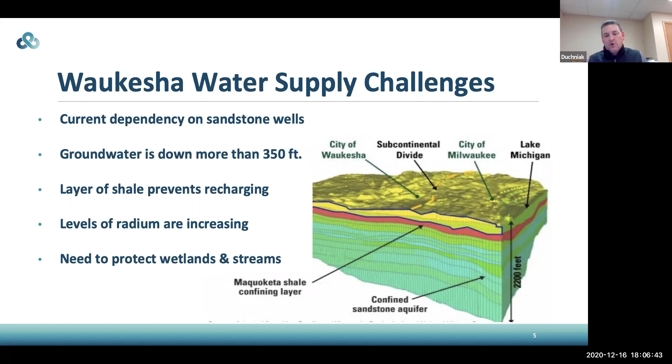That drawdown results in water that is older, having been in contact with the natural geology, and radium has been transferred to that water—we have radium in our water, among other contaminants. So we need to look for a new water supply, and we also need to protect our wetlands, rivers, and streams, since any of the alternatives has a significant impact on local wetlands, rivers, and streams. We went through the application and determined that Lake Michigan is the only reasonable alternative. It's been over 20 years of research—I've actually been at the utility just about 19 years. We studied 14 of those alternatives in depth. Lake Michigan came out as the only reasonable, long-term, sustainable water supply for the city of Waukesha. It is also protective of the environment, and it is the best solution for ratepayers, with the least amount of environmental impacts. Very minimal acreage is impacted as a result of this.

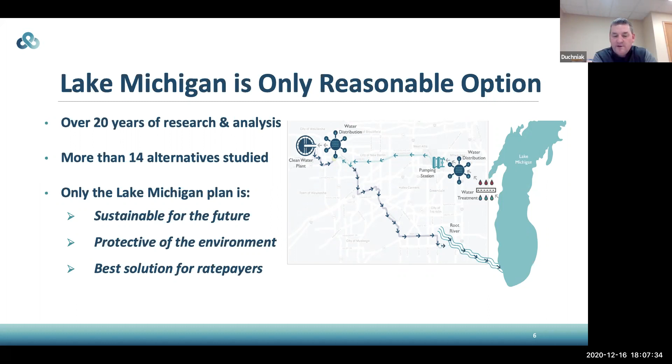This was studied and completed through an environmental impact statement, done in phase 1 of our program. We worked with the DNR to get approval, and that was developed through an environmental impact statement which analyzed those 14 alternatives.

Once the DNR determined it was an approvable application, they notified the Great Lakes Compact Council that they believed they had an approvable application, and that was in December of 2015. After about 6 months, the Great Lakes states and Canadian provinces unanimously approved our application for Great Lakes water.

Then we moved on to negotiate a deal with the city of Milwaukee to supply us with water for the residents of the city of Waukesha.

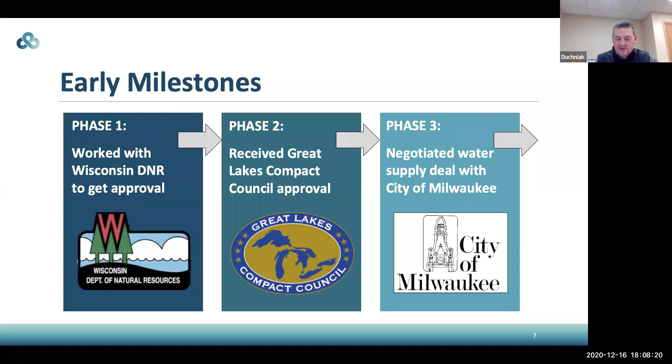In the 4th phase, we actually settled with New Berlin on a booster pumping station site. We decided to relocate that to a site that wasn't originally available, as it was under contract to be developed as a memory care facility. When that memory care facility fell through, that property became available to us.

We met with the owners and came to an agreement with them, and came to an agreement with the city of New Berlin on relocating the reservoirs and pump station from the site in Minooka Park to the site at the Nike Rempe site, on Broadway and the bypass within the city of Waukesha. So that booster pumping station and reservoirs will be located at that site in the city of Waukesha.

We also worked with the federal government and applied for and received a WIFIA grant, which is basically a low interest loan for this program. It's a government subsidized loan, and we get it at a very low interest rate over a longer term to help us reduce the cost to our residents.

And we are now in phase 6, where the pipeline construction has begun. Construction of the return flow pipe has commenced. We started at the clean water plant in the city of Waukesha, and we are now working up Century Drive towards Sunset Drive in the city of Waukesha.

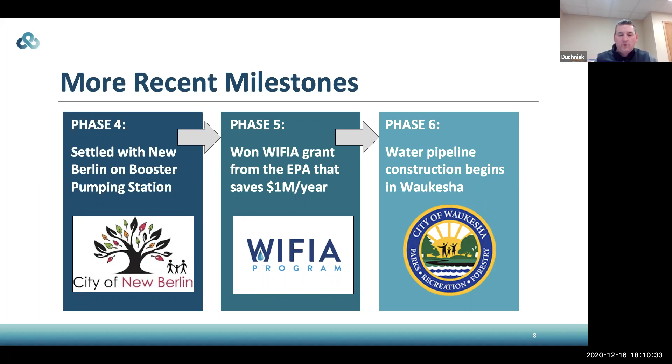With that, I'm going to turn it over to Katie, who will talk a little bit more about the route and the communications you can expect during this process. So Katie, it's on to you.

Thank you, Dan. As Dan mentioned, my name is Katie Richardson. I am the program manager for the Great Water Alliance and have been working with the water utility on this program for the last 4 years. I'm going to talk a little bit about the route, and Jeff will get into more details about that, and then also what you can expect to see as we move through construction as far as communication.

This part of the water supply pipeline that we're talking about tonight is known as Contract Package 2A, or CP2A. As Dan mentioned, that starts in the vicinity of Coffee and Schwartz Road in New Berlin, and then heads east to the city of Milwaukee and a new water supply pumping station that's going to be located in the city of Milwaukee. As you can see, that's the light blue, light greenish line on the top of the map here.

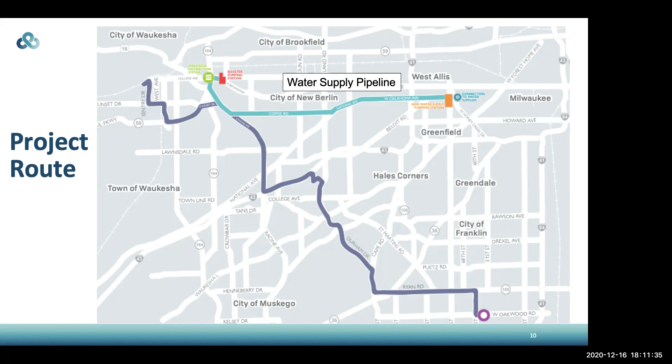The construction for this pipeline is going to begin in 2021. This year in 2020, we've been working on doing the construction submittal reviews and making sure that the contractor has all the materials that we have specified ready to go for construction to start.

We anticipate next year in 2021, construction beginning right away in January, and it will move through New Berlin, including both tunneling or trenchless technologies and open cut activities, which is an open trench that you'll be able to see the pipeline construction in throughout next year. We anticipate the completion of construction of this section from Schwartz and Coffee to the city of Milwaukee to be completed in 2022.

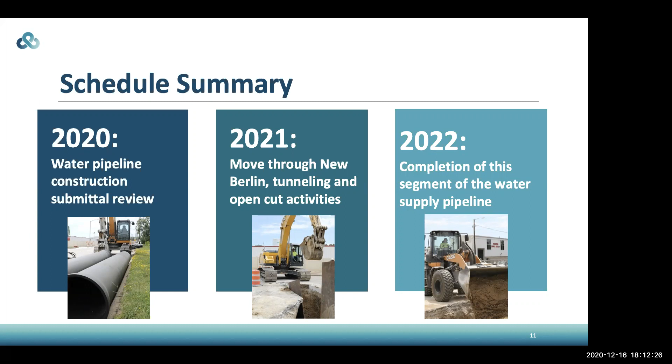During that time frame, your best source of information is going to be the Great Water Alliance website. The website, which you likely have visited if you registered for this open house, has information like an interactive route map. That route map is updated with icons showing where construction is and the progress being made, so you can check in to see exactly where construction is located.

We'll also have information specifically related to the city of New Berlin in the In Your Area for New Berlin section. If you go to In Your Area at the top of the website, you can click on New Berlin and find construction updates, potential open houses, or any other items we need to communicate specifically to you. There will also be overall general construction updates on the website, including information about the whole program and all the different contract packages and where they are in construction.

Additionally, the website has a lot of other ways to sign up or get information from us, including communication channels like texting if you want information to come to you instead of having to go find it. We also have a hotline number, available here or on our Great Water Alliance webpage. That hotline is a voicemail system, so you'll leave a voicemail and someone from our team will get back to you within 24 hours. That's always available to you.

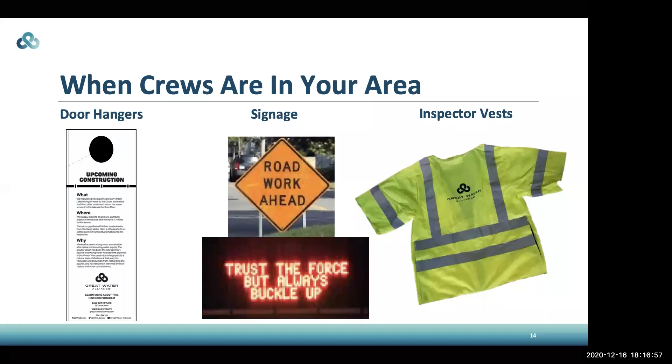They'll have on a vest or jacket with our three-looped Great Water Alliance logo - you can see a picture of it here on the slide. If you have a question when construction is in your area, whether it's right out front or you're driving through, look for the person with our logo on their safety gear. That is who you want to approach to ask any questions that need to be answered in the moment.

When construction is occurring, whether you're driving by or it's in the right of way near your home, safety is our number one priority. If you need to talk to somebody and have a question that needs answering right away, please look for our inspector in the safety vest with the Great Water Alliance. Also pay attention to the barrels, signs, and flagging operations. Your safety and worker safety are our priority, and we want everything to go smoothly so construction can be done efficiently and get out of your area as quickly as possible.

It's really important that you are mindful of the signs and what the inspectors are asking you to do. If you go out on site and have a question, or something is happening adjacent to your property in the right of way, please pay attention to where the construction workers or inspectors ask you to stand. There may be situations where work is happening underground in a trench, so we want to make sure you're in a safe spot to stand and talk to somebody. Just find the inspectors with the Great Water Alliance so they can help you.

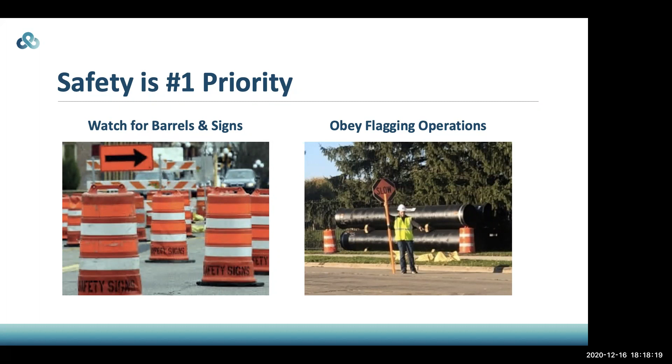So with that, I'll turn it over to Jeff, and he can get into a little more detail about what the construction is going to look like.

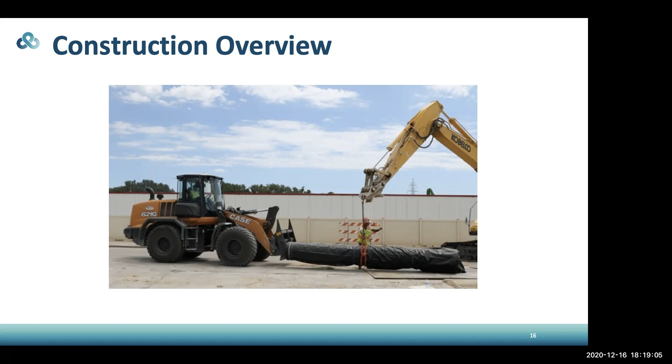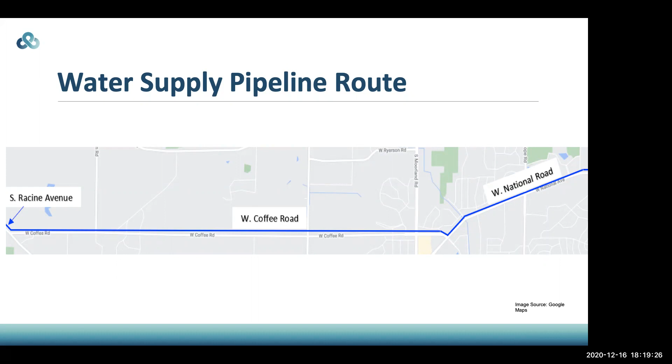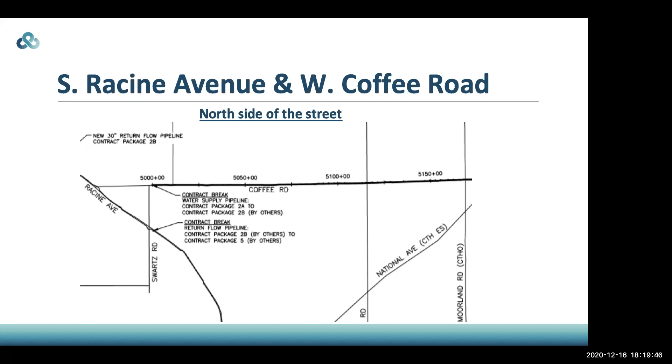This is a quick overview of the route that the water supply pipeline will be following. As Dan mentioned, it runs along National Road and Coffee Road. On Coffee Road, in general, the return flow pipeline will run on the north side of the road from Coffee and Swartz Road, through the city of New Berlin to National Avenue, and then along National into the city of Milwaukee. The water supply pipeline is scheduled to lay primarily on the north side of the road as well.

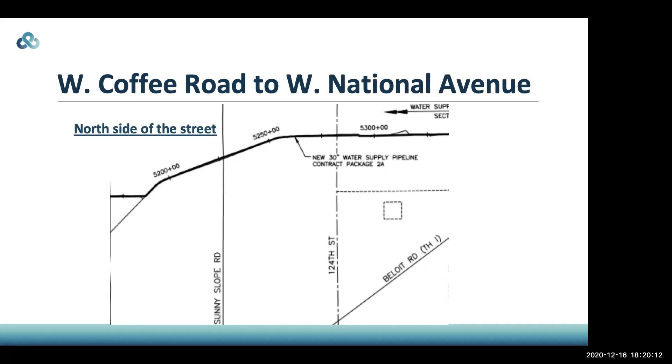The anticipated start will be here at Coffee and Heide Lane. This location was chosen to start during the winter months while the asphalt plants are closed. This section will remain open to through traffic with minimal lane restrictions and flagging as necessary.

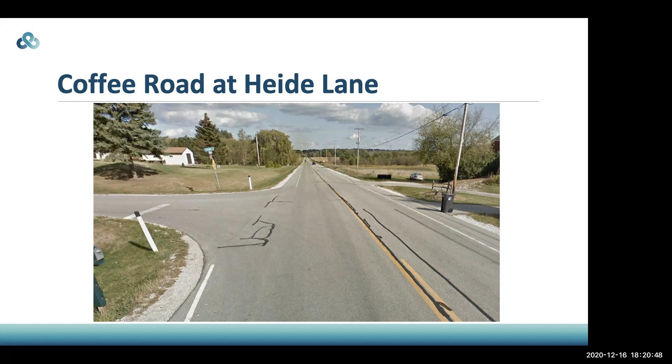Some of the innovative technologies used to complete a project of this nature are trenchless technologies, which include horizontal directional drilling and jack and boring. We utilize trenchless technologies at major intersections and waterway crossings to minimize the impact to the community and environment, and to make it a less impactful process in those areas.

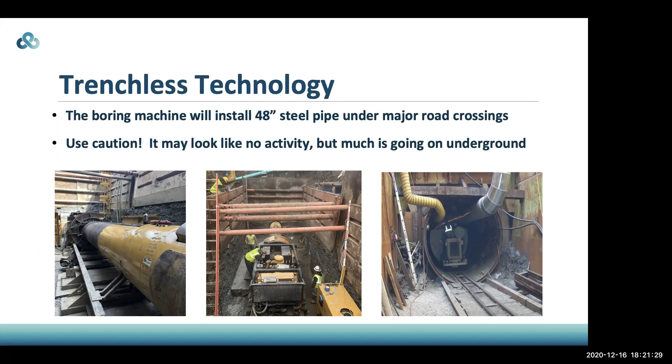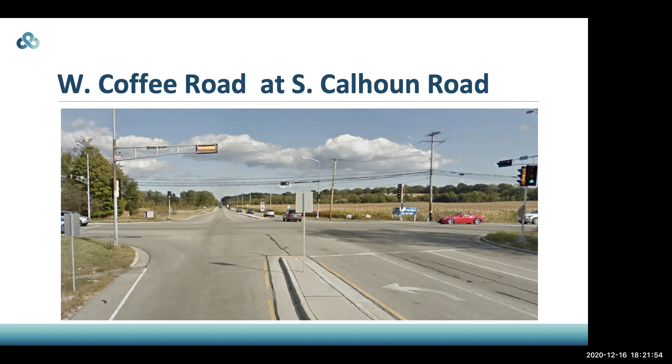One of those locations is Coffee and Calhoun, where we'll run trenchless technologies through the intersection to try to maintain traffic at this busy location and minimize impact to the community. Another location is Coffee and National, where we'll use a variety of innovative construction techniques to minimize impact and maintain traffic as best we can. Please be aware we may need to block some lanes in some locations, but bear with us. We've gone through extensive traffic control studies to make sure we're providing the least impact possible.

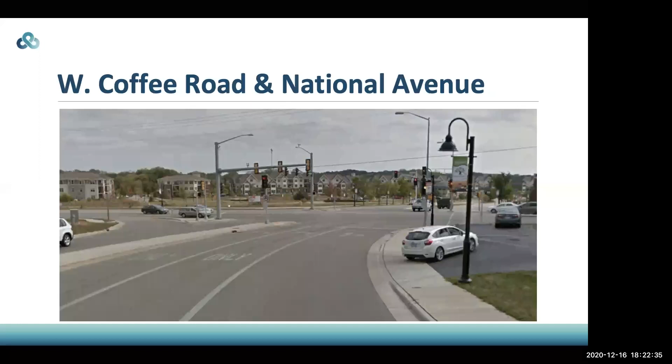Super Excavators is the contractor that was awarded this contract through a competitive bidding process, and completed a pre-qualification process prior to the awarding and bidding of the contract. We're very confident in Super Excavators' ability to perform this work. Some of their specialty work includes underground work such as sewers, water mains, force mains, earthwork, jacking, boring, tunneling, dewatering, clearing and grubbing, trucking, and traffic control. It's worth noting that Super Excavators is a local contractor in the Milwaukee area, which is a good plus for the community as well.

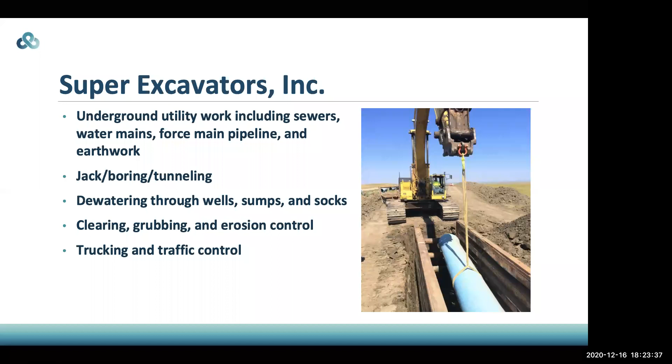Door hangers, as Katie mentioned, we do place door hangers in advance of work as the project progresses. Door hangers are anticipated to be set out 14 days prior to any street closures or work ahead of the contractor, giving residents notice that we are coming. 3 days prior to any restrictions to the property, we place another door hanger with specific details of the restrictions. Then 1 day prior to work approaching the property, we'll place a final door hanger with final information about what restrictions are coming.

Please note that when we place door hangers, we're not allowed to access further into the property. So we may need to place these on front doors, front fences, or the immediate side door, but we can't go around to the back of the property. It's just not feasible for our crews to do that. So be aware you may have a hanger on a door you don't normally use.

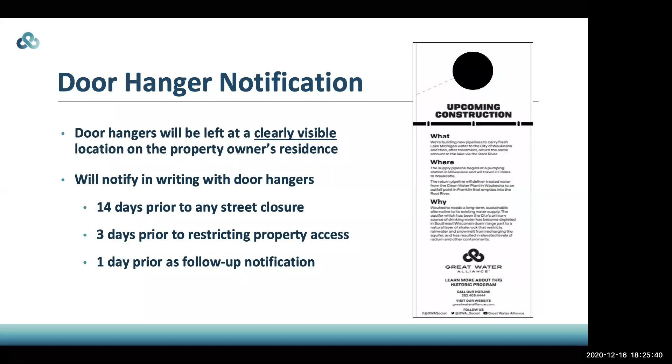Dan did mention mailboxes and restoration of mailboxes. If we need to take a mailbox down, we are responsible for putting it back up. Same for any other personal property or anything within the right of way. We will work with you to make sure everything disturbed is put back in a like-new or better condition than what we found it in. That is one thing we are going to strive to do.

Okay, let me turn my video back on. We did have one question submitted by Steve Miner. We did meet with him on site, but it was about the restoration of his driveway, just as Jeff went over. Katie, I do not know if we have any other questions out there.

No, just the preview, like you said Dan—we had the submittal with some concern about trees on a property, and then the question about mailboxes and driveways. So we've answered all of those. If anyone else has a question, please move your mouse, find the Q&A box, and submit those to us.

We'll give everybody another minute or two before we wrap up here. Some of the other questions asked were mainly on routing, where construction was, and that sort of thing. If people have specific questions on where their actual construction is going to take place, or where it's going to be in front of their house, they can contact us, and we will be more than happy to meet with them or talk one-on-one exactly where that is going to be.